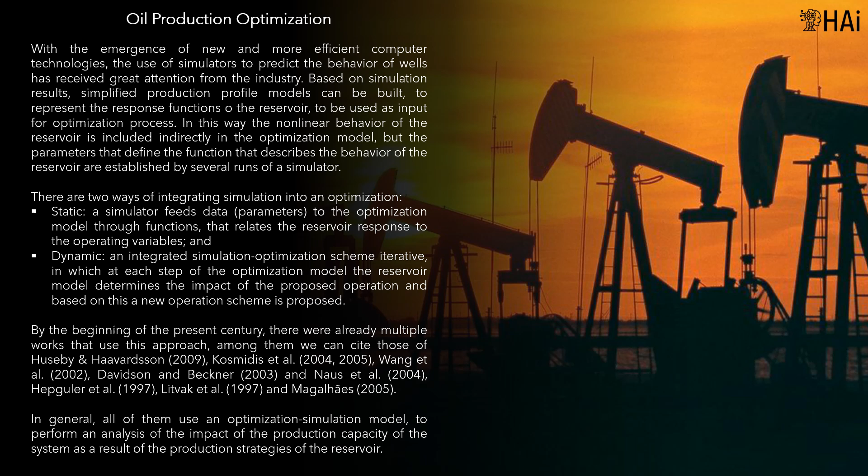There are ways to integrate a simulation model into an optimization model. Static: a simulator feeds data to the optimization model through functions that relate the reservoir response to the operating variables. And dynamic: an integrated simulation-optimization scheme, iterative, in which at each step of the optimization model, the reservoir model determines the impact of the proposed operation, and based on this, a new operation scheme is proposed.

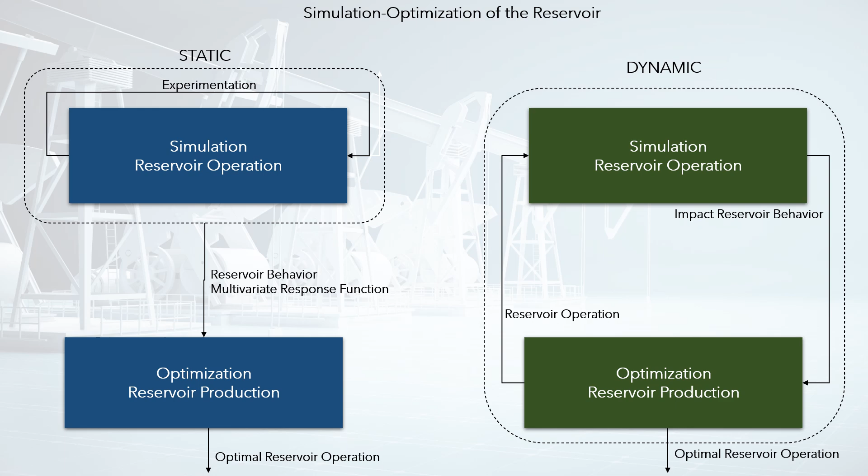Bittencourt et al. presents an optimization approach in which data generated by the Eclipse reservoir simulator is used in the calculation of the cost functions. Considering the simulation results and cost parameters of the oil industry, the optimizer returns the cash flow analysis for the current case. The case considered is when the production of one reservoir begins to decline, a second reservoir enters production to obtain the maximum capacity of the installed facilities. The parameters to be obtained from the simulation are the time when the second reservoir must enter production, and how long the new reservoir in operation will last. The data calculated by the simulator are the crude oil production rate, and the number of wells required to reach the goal rate in each time interval.

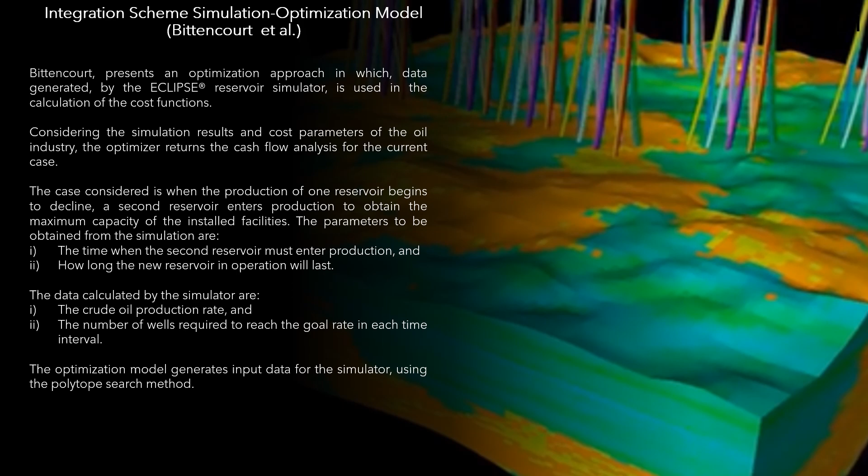The optimization model generates input data for the simulator, using the polytope search method. The iterative procedure used is: first, the simulation must be initialized with the input parameters. After this, the iterative process begins. Step 2: the simulator runs the model and obtains data on the production rate and the number of wells required in the period considered. The information enters the optimization algorithm, which defines the required production profile and the remaining production periods, given the exploitation information of the reservoir, so that the algorithm distributes costs and revenues over time and returns the cash flow value for the defined parameters. The optimizer sends the production program to the simulator. The simulator will feed the data to produce new information on the behavior of the reservoir and the period of operation of the reservoir, and the algorithm returns to step 2.

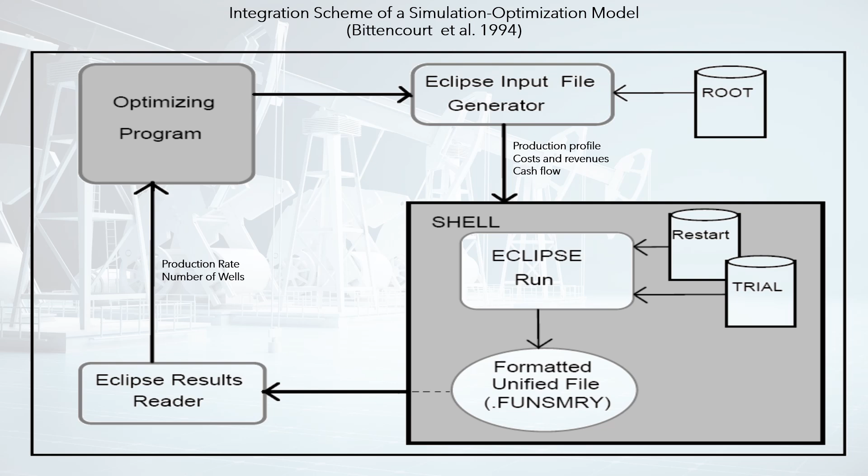In the case to be presented, the optimization algorithm must communicate with the simulation algorithm, either in static or dynamic communication. If the oil recovery is secondary or tertiary, the communication should be dynamic, since the injection of materials into the subsoil affects the pressures in the reservoir. For the case of primary recovery, the communication could be static, since the optimization model could simulate the evolution of the pressures in the reservoir as a consequence of the accumulated production.

Topic: Field Operations Modeling. The mathematical modeling of the production system is based on the combination of the representations proposed by Iyer et al., 1998; Barragan Hernandez et al., 2005; and Kosmidis, 2005. The need to combine these conceptualizations lies in the fact that they have complementary elements to configure the productive system. For the mathematical modeling, a reservoir is defined as a porous, permeable underground formation, containing an individual reservoir of hydrocarbons confined by impermeable rock or water barriers, and is characterized by a unique natural pressure system. OilPro includes the following entities.

Production system corresponds to the macro facility that houses all the basic production facilities required to produce oil and/or gas. Field is the set of deposits in which oil and/or gas is deposited, and that together make up the production system. Reservoir is a confined deposit where hydrocarbons are. The reservoir is associated with a field and the surface piping systems required to handle the process.

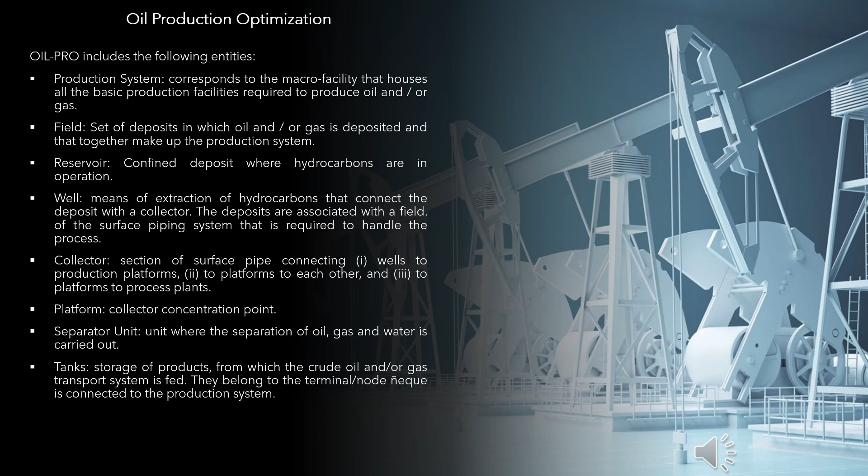The conceptualization of the field can be done based on the following principles. Well corresponds to the basic unit of production. Reservoir corresponds to a set of wells that operate an oil deposit interconnected in the subsoil. Field corresponds to a set of multiple oil deposits which contribute their production to a collection and processing infrastructure.

The collection infrastructure is composed of separator, a production unit in which oil, gas and water are separated; collector, a network of pipes that connect the fields with the separator; and tanks, storages of oil, gas and water already processed.

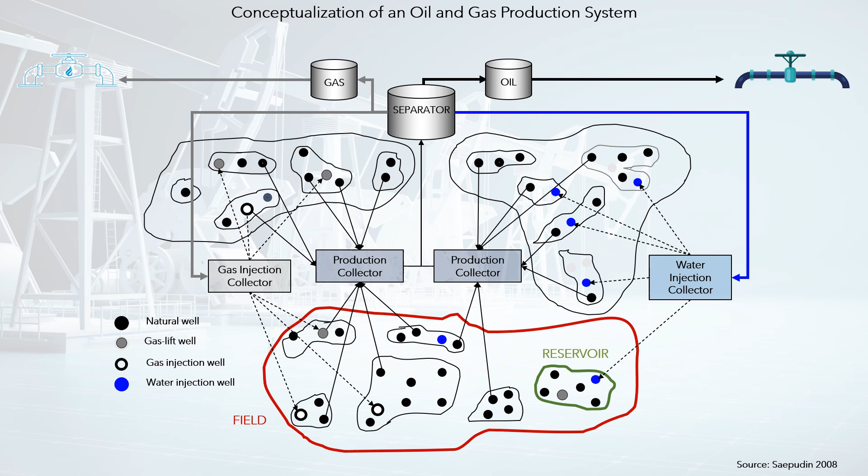The topologies of the network can be very varied, since an oil and gas production facility can have multiple components of each type. The image presents the hierarchical connectivity of an oil field infrastructure.

A processing system has multiple fields of production. In a production field there may be more than one reservoir. A reservoir is exploited by multiple wells, some for extraction and others for injection. The latter type of wells depend on the technology used to exploit the reservoir.

The wells are connected to a collector that conducts the oil to a platform. The platforms can be connected to other platforms, or to a separator plant. The collectors are used for these connections. The separator plants are used to separate oil from the water, and the gas from the oil.

These products are stored in tanks: oil, to be dispatched to other facilities of the oil chain; gas, for reuse in injection or to be dispatched to other facilities of the natural gas chain; and water, for reuse in injection or to be processed in water treatment plants, to be re-injected into aquifers, or to be incorporated into the surface water flow system.

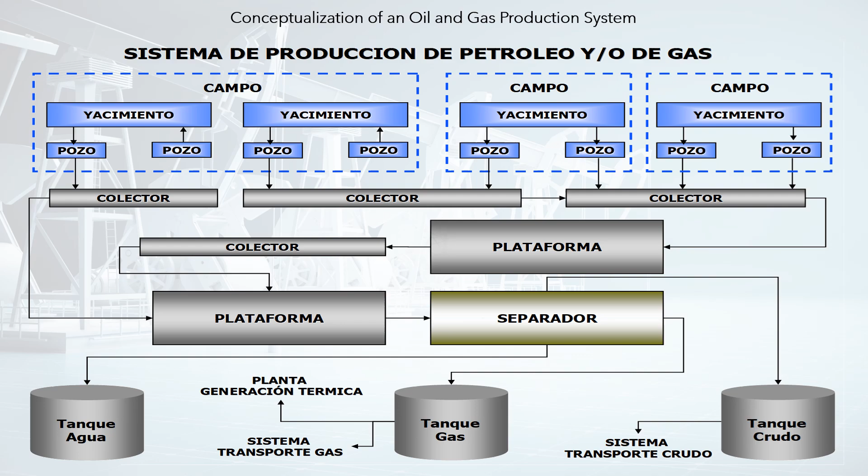According to the location of the reservoir, two types of oil extraction facilities should be considered. Offshore, when the exploitation platforms are in deep sea. Onshore, when the platforms are located inland.

The objective of the modeling is to determine the most profitable way to exploit the oil field. For this it is necessary to coordinate hierarchical decisions over time: strategy, tactics and operation. One of the main costs is related to energy consumption. To calculate it, it is necessary to determine the energy consumption, then multiply it by the energy price.

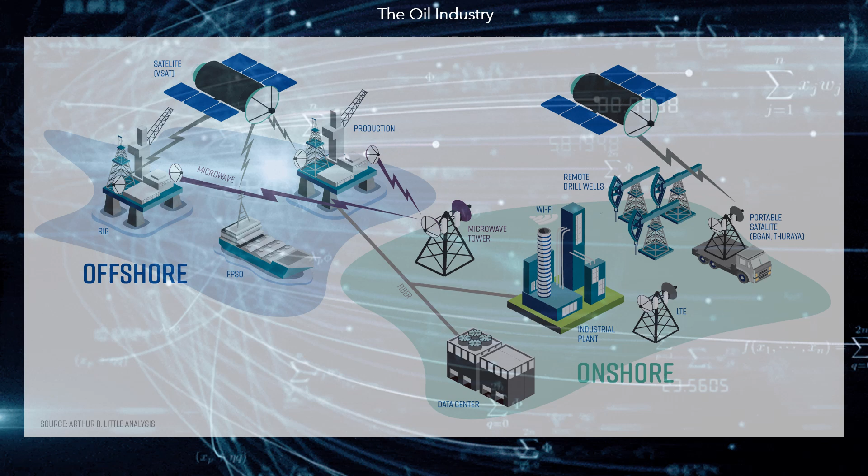The modeling presented below is oriented to calculate the consumption of energy on shore facilities. The analysis of the price of energy is left aside, which is a very important problem given the multiple types of negotiations that can be carried out. This optimization process is called ETRM, Energy Trading and Risk Management, and is presented at another conference.

Each well consists of two pipe segments, the well pipe and the flow conduction line. Between them is a shutoff valve that is used to control the flow rate. The part of the well that is inside the reservoir is called the wellhead.

Energy consumption in an oil field can be divided into three phases: energy consumed in the well during the production process, injecting or extracting materials; energy consumed in the conduction of oil at surface level, in the gathering system of the extracted materials and in the conduction of materials to be injected; and energy consumed in industrial facilities processing the extracted materials.

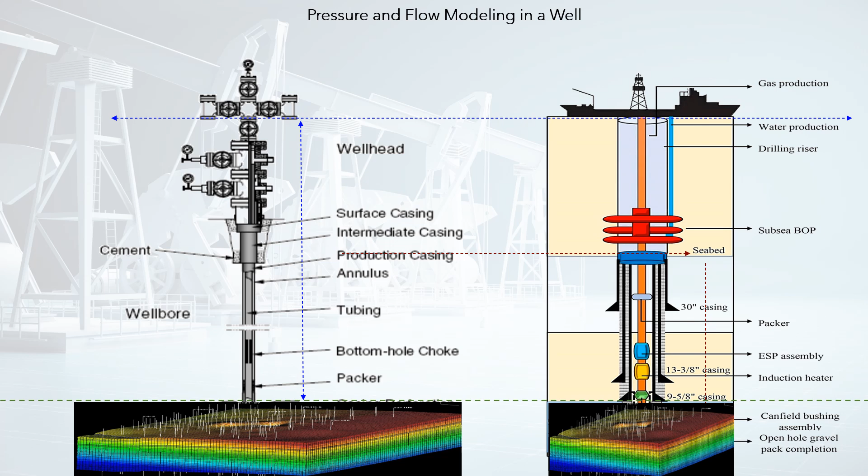The determination of energy consumption in the hydraulic system of an oil field results from the integration of energy losses that occur in each well, and energy losses in the gathering and distribution system. Power for the surface piping system is usually provided by a pumping station and a compressor.

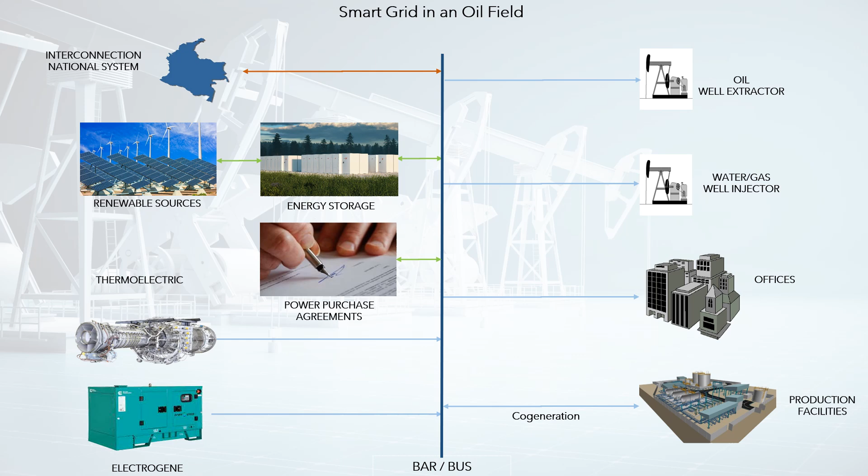Consider all energy consumption in the field. Additionally, energy consumption in industrial facilities and in offices, buildings and the like must be considered.

The model assumes that the problem of locating wells has already been solved previously, and they have been drilled and are ready to produce. Temporary closures are considered in order to control the production of the system. Together with the reservoir simulation models, OilPro can locate the wells that should be opened or closed to optimize production.

The problem contemplates a planning horizon divided into several periods, each with a known demand, fluctuating in time, but assumed constant within each period. It is considered the decrease in pressure at the mouth of each well due to extraction, and pressure recovery when production is stopped.

Pressure drop restrictions are included in well pipes and collector pipes that interconnect wells to platforms and platforms with each other. The inputs of the system are flows of crude oil and/or gas coming from the reservoir under specific conditions of physical-chemical composition, entering through several wells. The outputs are independent flows for each product extracted from the reservoir, to be stored and subsequently delivered to the respective transport networks, delivered directly to the auxiliary services plant associated with the production system, and/or discarded in the case of gas flaring.

The relationships that determine the production behavior of a reservoir are pressure, GOR or gas-to-oil ratio, and WOR or water-to-oil ratio. GOR and WOR and pressure are nonlinear functions of cumulative oil production. Linear piecewise interpolation may be used to model nonlinearities from a set of data obtained from reservoir simulations. The actual ratios for pressure, GOR and WOR are taken as functions of the initial pressure, physical properties of gases and gas mixtures, represented in phase diagrams, which characterize the state of matter under specific conditions of pressure, volume, and temperature of the oil, and the oil's initial volume.

The reservoir pressure function is a nonlinear function of accumulated production. The variables used in the modeling are: the index K, associated with the interval in the linearly approximated function; PDY T Y, the pressure in reservoir Y at the end of period T; PAY T Y, cumulative production in reservoir Y up to period T; and FIP T Y K, a variable that indicates the interval K of the curve in which reservoir Y is, at the end of period T.

The objective function must involve, in one way or another, the total extraction of oil from the reservoir. With respect to this behavior, the function has a nonconvex curvature, and therefore accelerating the speed of oil extraction leads to smaller volumes to extract. This behavior complicates optimization algorithms by turning the problem into a nonlinear nonconvex problem, the solution of which requires solvers for global optimization. To address this, the nonlinear function can be linearized using a piecewise linear approximation. Given the nonconvex character of the function, it will be necessary to include binary variables to ensure the consistency of the representation.

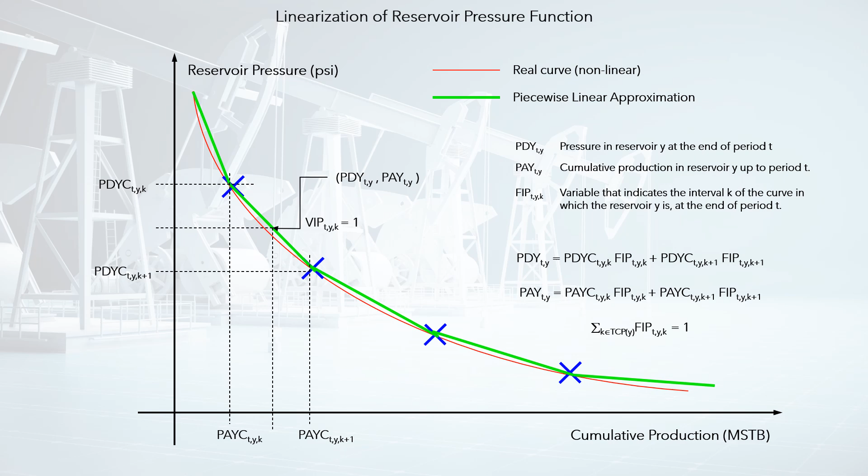Associated gas production: in an oil and gas reservoir, the proportion of gas produced associated with oil, or GOR, varies with accumulated production in a nonlinear way. Although gas has demand and market value, the amount of gas produced in oil fields must be controlled; production costs of the system are restrictive, and therefore only a gas-oil ratio no higher than a limit established by economic considerations can be extracted. The gas can be used for both injection and power generation, and additionally for sale, after being properly treated.

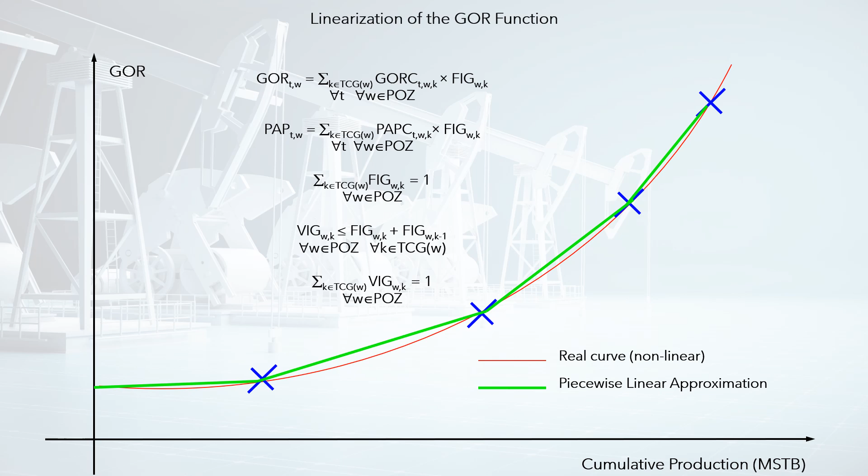As in the case of reservoir pressure, this behavior complicates optimization algorithms by turning the problem into a nonlinear nonconvex problem. To address this, the nonlinear function can be linearized using a piecewise linear approximation. Given the nonconvex character of the function, it will be necessary to include binary variables to ensure consistency of the representation. Water production: on the other hand, the water produced together with the oil may be used in the production system, either for injection into the reservoir or retreated to take it back to an aquifer. The WOR must be restricted to prevent excessive production. The form of the WOR function is not known a priori, but can be established by field data and/or reservoir simulations.

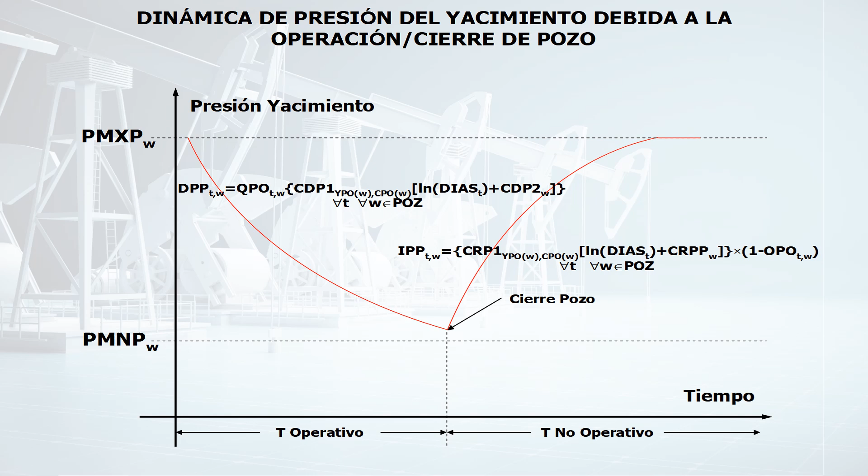The following graph summarizes the pressure and flow dynamics model used, related to oil production wells. When the well is operating, the pressure loss is proportional to the amount of oil extracted by the well. This pressure loss is linked to the variable dppTW. The operation of the well is modeled by the binary variable OPO-TW, which is 1 when the well is operating, and 0 otherwise. When the well does not produce, the pressure at the wellhead increases according to the duration of the non-operation period, until the maximum level of pressure recovery is reached. This pressure gain is linked to the variable IPPTW.

Primary recovery, mechanical pumping: this technique lifts crude oil from the wellhead to the surface using mechanical energy. It is a simple, efficient, and easy technique for operating wells. With mechanical pumping, it is possible to pump from very low pressure wells. To maximize the rate of oil production, it is applicable to narrow holes, multiple well terminations, and high temperature and viscous oils.

The system is also easy to switch in the wells with minimal cost. The major disadvantages of mechanical pumping include excessive friction in curved, deviated holes, low efficiency in gasified wells, limited length due to rod capacity, and it is prohibitive for offshore operations.

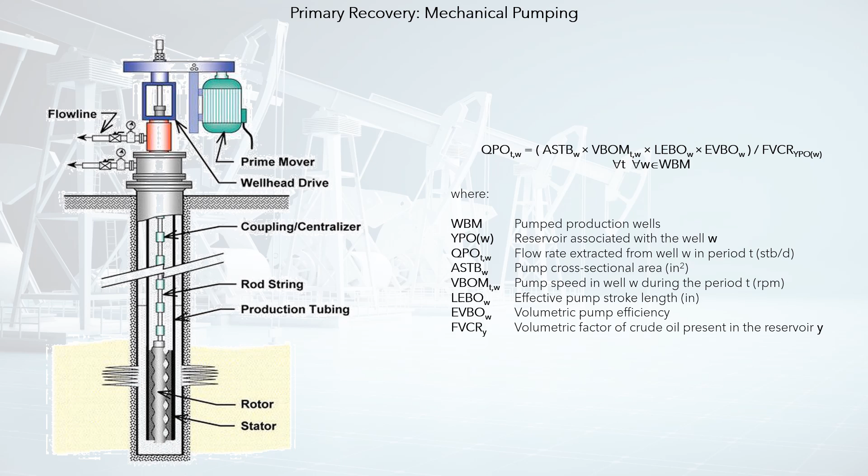The flow extracted from wells is calculated according to the additional pressure generated by the pump system. The variable VBOM-TW controls the mechanical pump and corresponds to the rotational speed in RPM.

Gas lift. The technique of continuous lifting by gas, or gas lift, is one of the most used methods around the world. Typically, high-pressure gas is continuously injected into the annular space of the well, through an injection valve, and flows into the well pipe to a point near the wellhead. The gas decreases the average density of the fluid within the pipeline, reducing the hydrostatic component of the pressure at the wellhead, and creating a pressure gradient, sufficient to produce flow from the reservoir to the surface facilities.

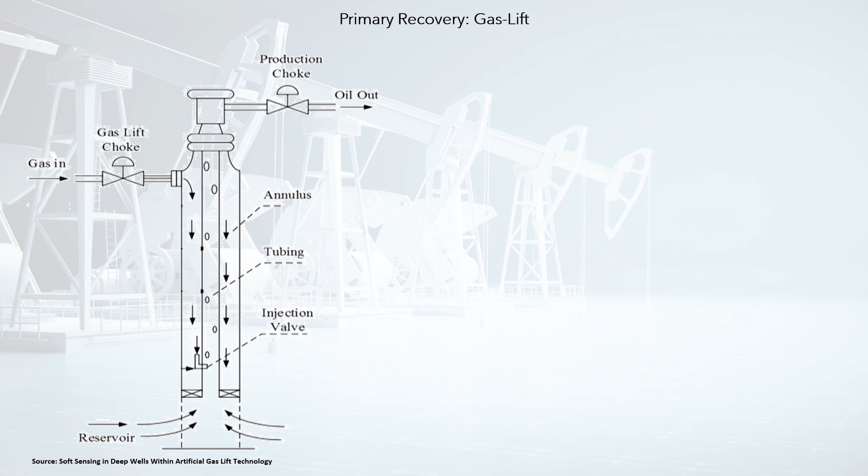Gas lift, or bubble pumps, use the artificial lift technique of raising a fluid, such as water or oil, by introducing bubbles of compressed air, water vapor, CO2, or other vaporous bubbles, into the outlet tube. This has the effect of reducing the hydrostatic pressure in the outlet tube, versus the hydrostatic pressure at the inlet side of the tube. The amount of gas to be injected to maximize oil production varies based on well conditions.

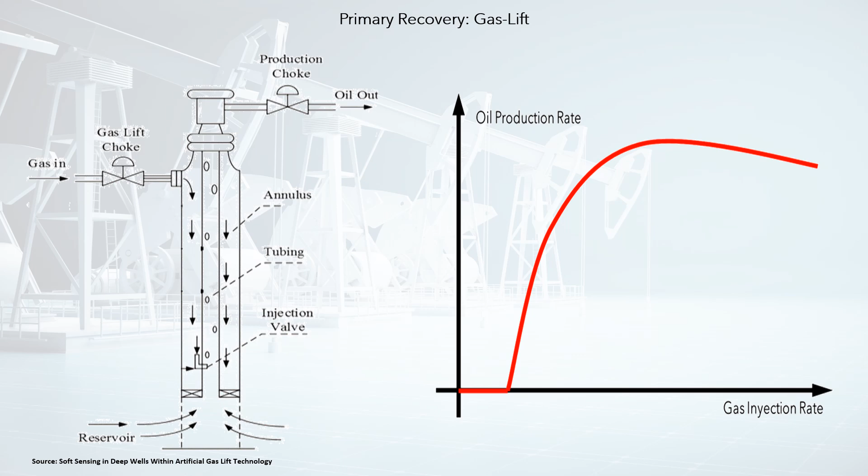Too much or too little injected gas will result in less than maximum production. Generally, the optimal amount of injected gas is determined by well tests, where the rate of injection is varied, and oil production is measured. Alternatively, mathematical models can be used to estimate the optimum gas injection rate. Such models offer significant economic benefit, since they allow one to simulate the performance of an actual, or planned, gas-lifted well, using a digital replica of the well.

The ratio of gas injection rate in gas lift operations to outlet rate expresses the response of an oil production well to gas injection. As the injection rate increases, the production rate increases to a maximum value, beyond which the energy losses incurred by fluid friction in the production columns exceed the decline of hydrostatic pressure, forcing the rate of production to decline.

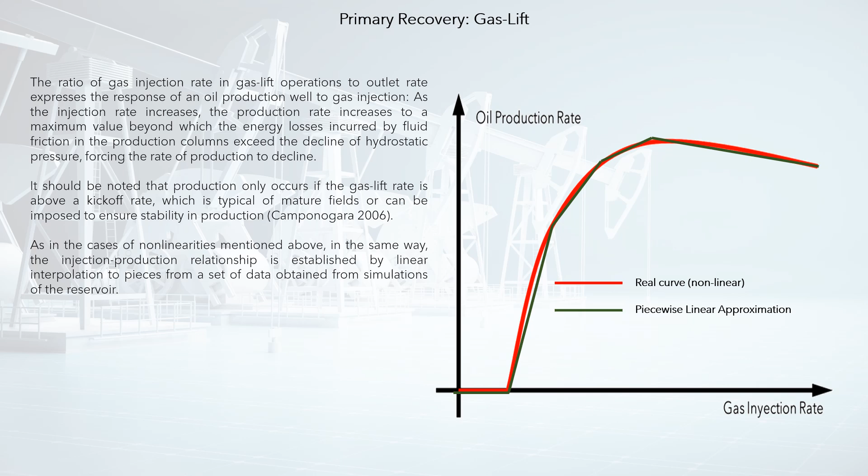It should be noted that production only occurs if the gas lift rate is above a kickoff rate, which is typical of mature fields, or can be imposed to ensure stability in production. As in the cases of nonlinearities mentioned above, the injection-production relationship is established by linear interpolation in pieces, from a set of data obtained from simulations of the reservoir.

Although the gas is recovered from the oil at a later separation stage, the process requires energy to drive a compressor, to raise the pressure of the gas, to a level where it can be re-injected. The oilfield infrastructure produced using gas lift technology consists of an injection gas collection system, which includes a compressor, and a system for collecting crude oil, mixed with gas and other materials, consisting of the piping system, separation unit, and material storage tanks.

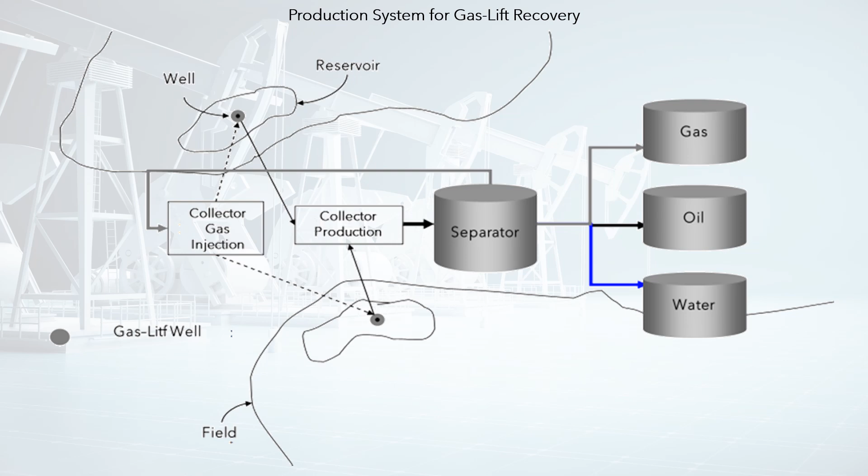Electrosubmersible pumps are a highly efficient artificial lift method for well operation. They can obtain better productivity even than mechanical pumps, in highly productive and deeper reservoirs. They are easy to install and operate, and their lifting costs are generally low. But it also has some limitations. It is completely dependent on the availability of high voltage electricity. It is not designed to withstand high temperatures, and its installation and repair are expensive.

Unlike positive displacement pumps, electrosubmersible pumps, which are multi-stage centrifugal pumps, do not displace a fixed amount of fluid, but create a relatively constant pressure increase for the flow. The outflow rate will vary depending on the pressure on the moving flow, exerted by the duct walls. Conventional controllers, which regulate the current delivered to the pump, offer pumping at a fixed speed and fixed flow rate. To overcome this limitation, there are variable speed controllers, which allow the frequency of the electric current to vary, and with it the production of the well.

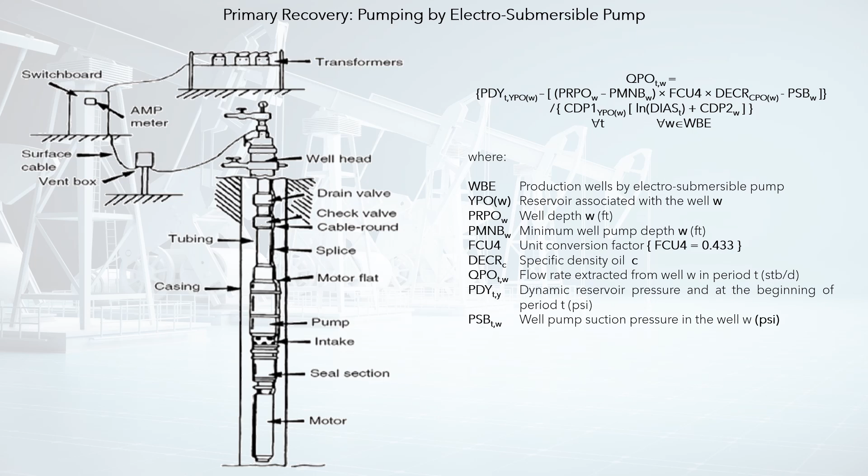The pressure increase is usually expressed as the pumping height, or as the flow height produced, defining the pressure differential created that the pump could offer. The flow extracted from wells is calculated according to the well pump suction pressure in the well. The variable PSB/TW is the pressure in the well W, in psi.

The use of mechanical pumps is not feasible in deep or deviated wells, due to the weight, or the great magnitude of the friction that occurs. A positive displacement pump, that can be used in these applications, is the hydraulic piston pump. This pump consists of an engine, with a reciprocating piston motor, driven by a fluid. Generally, it can be used in low API oil gravity wells, and in wells with high paraffin contents.

The high-pressure fluid driving the engine is injected from the surface, and is either returned to the surface through another pipe, or mixed with the fluid produced in the production pipeline. Water or oil can be used as propulsion fluid. Hydraulic piston pumping systems can lift large volumes of liquid from a great depth.

The energy source can be natural gas or electricity. It can also be applied to wells of different terminations, and offshore operations. Because the pump and pistons of the motor are directly connected, the volumetric flow rates in the pump and the motor are related through a simple linear equation.

The flow extracted from wells is calculated according to the flow rate of the propulsion fluid of the well W in period T. The variable QFP/TW rate is measured in barrels per day.

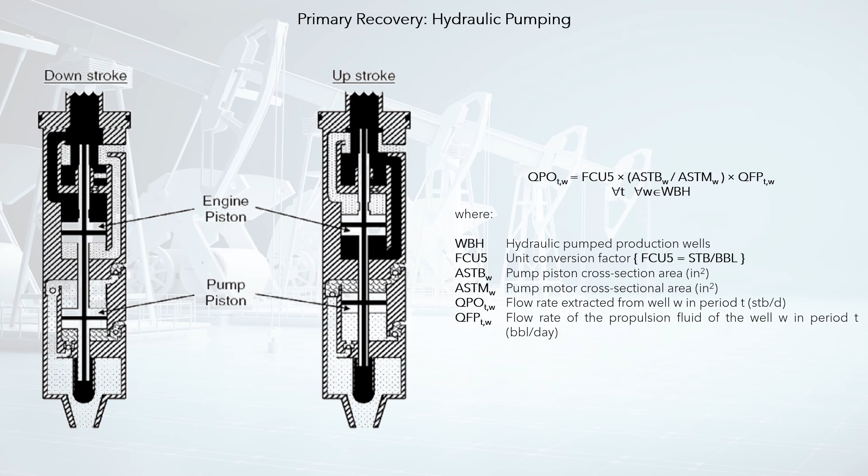Secondary recovery: gas and/or water injection. The injection of water or gas through injection wells produces a dynamic increase in the pressure of the reservoir, with which it is intended to maintain, or to increase, the productivity of the producing wells. This process is called secondary recovery.

This type of recovery involves simulating the process of managing the impact of the resource being injected, natural gas or water, in the reservoir. This entails the need to link the optimization model with the simulation reservoir model.

The modeling is fundamentally based on the dynamic pressure balance in the reservoir. It is assumed that the pressure throughout the reservoir remains uniform. This must be validated for each reservoir.

Another main hypothesis is that the injection during the T period affects the pressure conditions at the beginning of the T+1 period. The parameters coming from the simulation model are FPIG/TW, representing the pressure factor per unit of gas injection into the well W, and

FP/TW representing the pressure factor per unit of water injection into the well W. The impact of all wells linearly affects the pressure in the reservoir. Then, the resulting pressure is the sum of the impacts of all the wells that inject gas or water into the reservoir. The control variables are

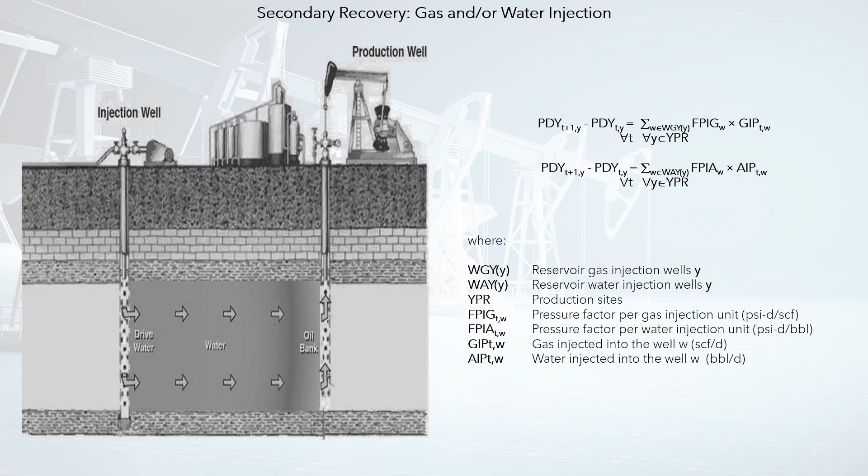GIPTW, gas injected into the well W during period T, and AIPTW, water injected into the well W during period T. And the state variable is PDYTY, reservoir pressure Y at the beginning of period T.

Tertiary recovery. Enhanced oil recovery, EOR, also called tertiary recovery, is the extraction of crude oil from an oil field that cannot be extracted otherwise. EOR can extract 30% to 60% or more of a reservoir's oil, compared to 20% to 40% using primary and secondary recovery.

According to the U.S. Department of Energy, carbon dioxide and water are injected along with one of three EOR techniques: thermal injection, gas injection, chemical injection. Microbial enhanced oil recovery, MEOR, is a biological-based technology consisting in manipulating function or structure, or both, of microbial environments existing in oil reservoir.

Since tertiary recovery is an injection process which affects the entire reservoir, the principles for its mathematical modeling are like those of secondary recovery. From the point of view of optimizing the use of resources using an injection, the optimization model must include the management of the resource that is being injected, which may be produced by the oil field, or must be purchased from an outside source.

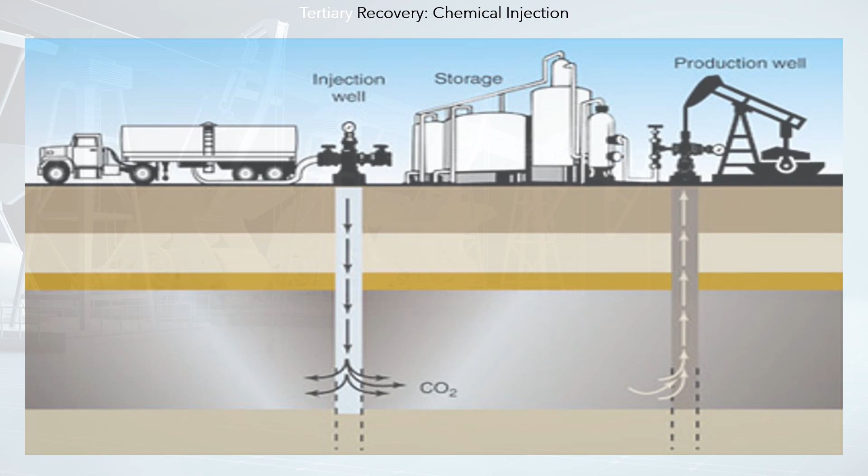Flow in the hydraulic system that consists of the wells plus the surface system. The injection of water or gas into the injection wells produces an increase in the dynamic pressure of the reservoir, with which it is intended to maintain, or to increase, the productivity of the producing wells.

This type of recovery involves simulating the process of managing the resource being injected, gas or water. For the modeling of the hydraulic system, reservoir plus surface facilities, it is assumed that the production of a well remains constant during each period, and that its production capacity is restricted by several factors.

Behavior of the pressure at the wellhead with respect to the reservoir. Characteristics of the well pipe. Features of the pipe of the collectors. Reservoir dynamics, energy conservation, and conservation of matter.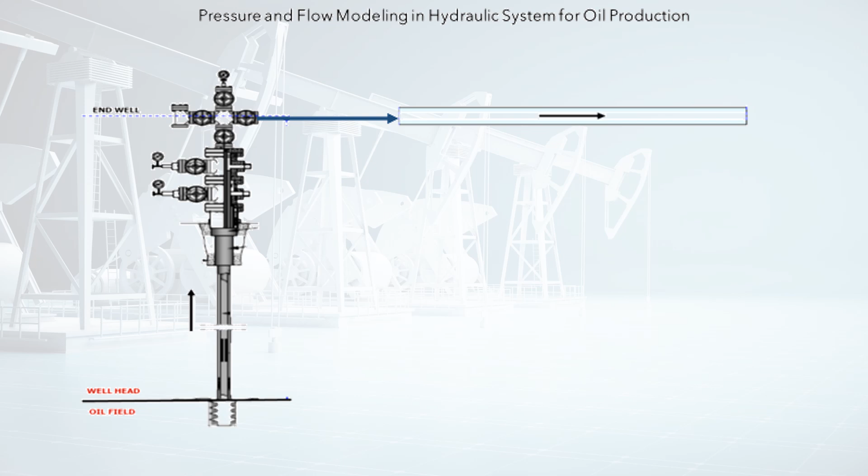Pressure and flow modeling in hydraulic system for oil production must be divided into two large parts: the energy consumed in the wells, and the energy consumed in the piping system. Each of the above parts requires specialized modeling equations.

The mathematical modeling of this flow system, which we will call surface flow, involves: first, it takes as an entry point the pressure at the wellhead, which depends on the reservoir pressure and the increase in pressures that may have been generated by primary recovery technologies, different from natural recovery.

These technologies are mechanical pumping, gas lift, pumping by electrosubmersible pump, and pumping by hydraulic pump. For natural recovery and for secondary recovery, the reference is reservoir pressure. In this way, the reservoir is linked to the surface pipe system.

Second, pressure losses in the well pipe are calculated, based on the characteristics and equipment of the well. Third, at the outlet of the well, the outlet pressure must be equal to the pressure entering the pipe. Fourth, in each section of the piping system, pressure losses are calculated, based on the characteristics and equipment of the section.

Following the principles expressed above, a system of equations is constructed that faithfully represents the decision-making process regarding the functioning of the field. The main decisions, for each period of the planning horizon, are: to operate or not to operate the well, flow in each production well, flow in each injection well, flow in each section of the pipe, engine speed, or pressure, of the pumps involved in the recovery process.

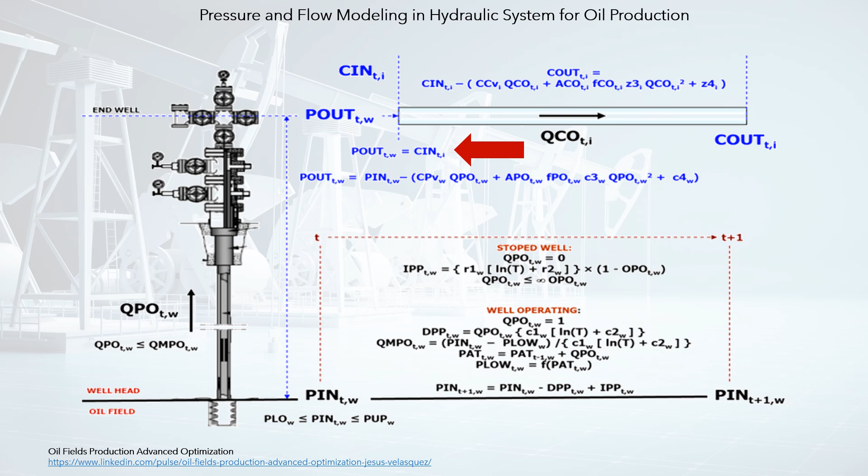Finally, the well system is linked to the piping system through the equation that indicates that the pressure at the end of the well must be equal to the pressure at the inlet of pipe I. This implies that P out TW must be equal to C in Ti, where I is the section where well W is connected. In this way, we have a model for the optimization, at a detailed level, of the entire hydraulic system of the oil field, chained with the oil recovery model of the reservoir, considering multiple technologies.

The following hypotheses are made with respect to product handling. All crude oil produced will be sent to another link in the oil chain through the oil and gas transportation system. Three possibilities are assumed to produce gas depending on the field from which it comes: associated gas in injection wells, associated gas in wells without injection, and free gas.

The assumptions are: in the fields with injection capacity, it is assumed that a limit exists on the amount of gas that can be injected. This is done by means of a unit of the service plant. In fields that produce associated gas, it is assumed that the amount of gas produced is known, as a function of the crude oil extracted.

In fields that produce free gas, the continuity equation is included in reservoir reserves. In those that produce associated gas, it is not included. The gas is sent to another link in the gas chain via the gas transport system. It is possible to use gas to provide the energy needed to extract the oil.

The water balance is not modeled in the system, only the quantity supplied is modeled. When water is the product that is injected, modeling of the final disposal of the water resource must be included.

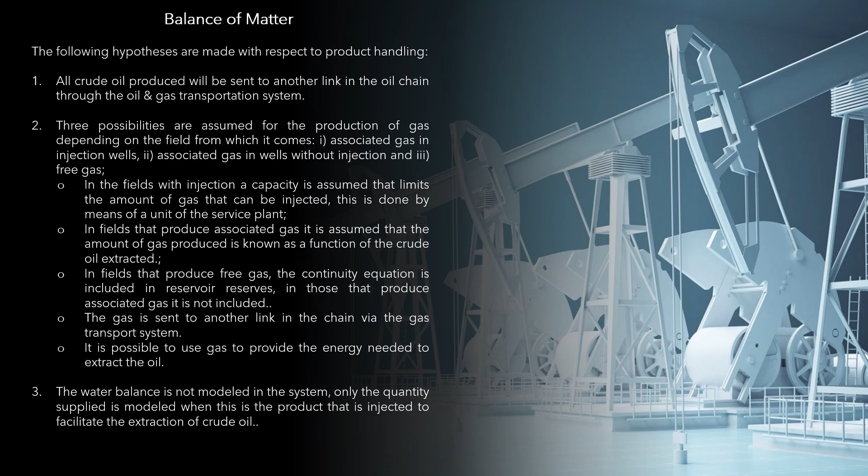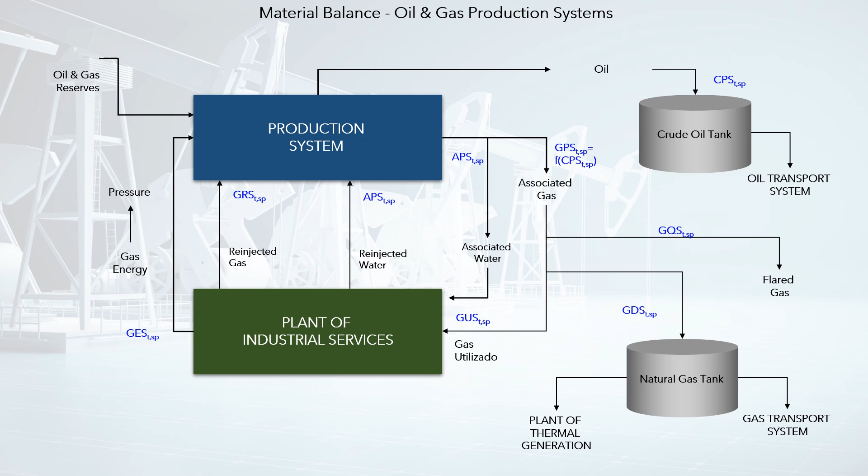The suggested objective function is to maximize the net present value of the oilfield operation. Energy is one of the most important inputs. The presented model focuses on the calculation of this component of the objective function.